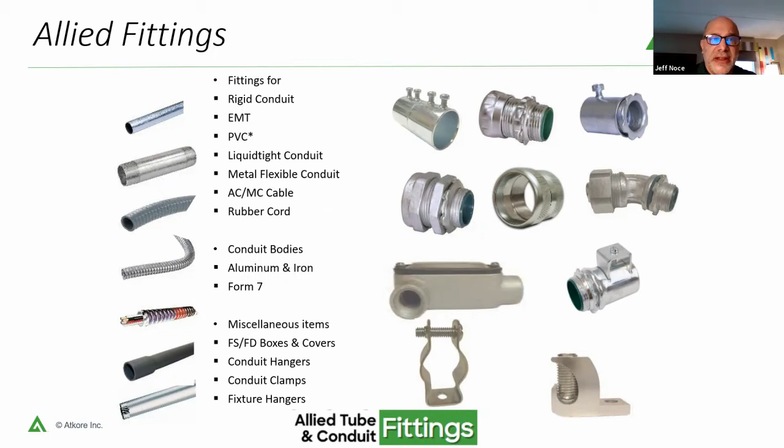One of the areas where Atkore is truly a leader, and one of the things that's nice about working for Atkore, is their investment into innovation and innovation into new products. How do we make products more labor saving and more of a benefit to our end customers?

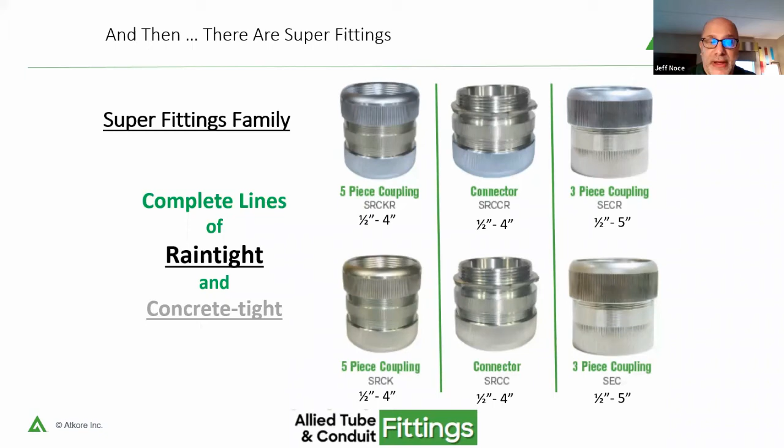The Super Fittings product line is a great example of this. We're going to run through this quickly, but we've got a line of couplings and connectors that are rain tight, concrete tight, and go up to 5 inches for heavy projects. Next slide, please.

The universal 3-piece super coupling. This product is nice because it replaces that old Erickson. With the Erickson, you'd have to take it apart and put everything together. This is 3-piece, no assembly required. It comes fully assembled, and it's good for both threaded and unthreaded product, eliminating the need to thread pipe in the field. If you're going from threaded to unthreaded, you don't have to do any threading. You just put it all in, lock it in, and you're good to go.

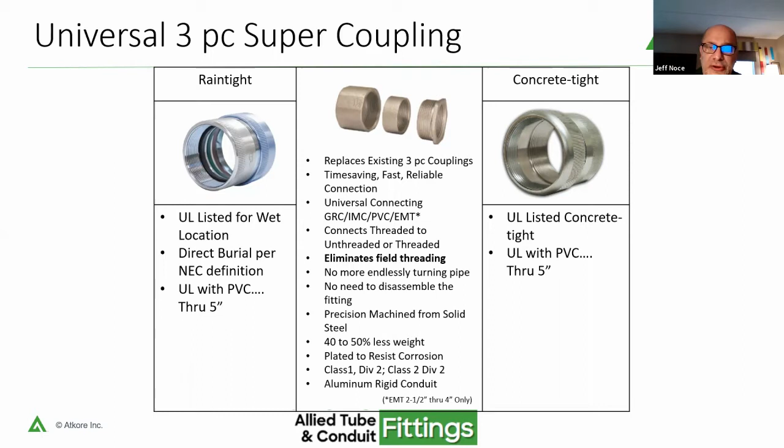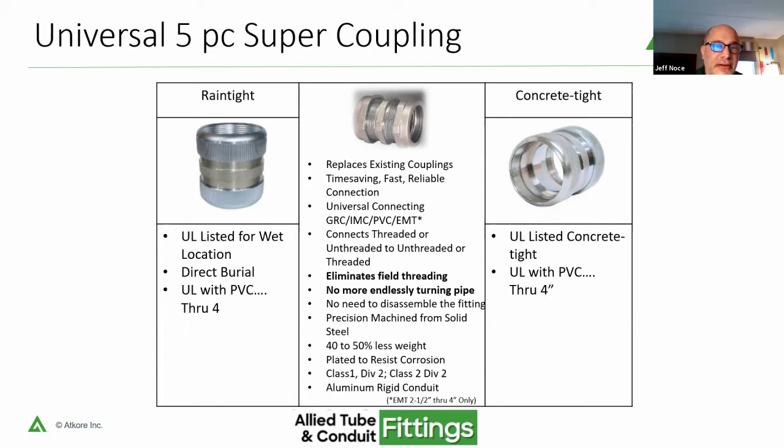Again, the 5-piece super coupling has the same features, but it replaces a lot of existing couplings where you've got to take everything apart. Major time saver, and again it eliminates field threading. What's nice is it's UL listed with rigid, EMT, aluminum, and even PVC pipe. This product is great to have in your van, a great utility product to keep on board.

And again, the super connector. It's like a conduit hub, but on steroids. Great utility part for the truck, meant to be a job site solution. It allows you to take rigid, IMC, PVC, or EMT, threaded or unthreaded, and go right into the panel box.

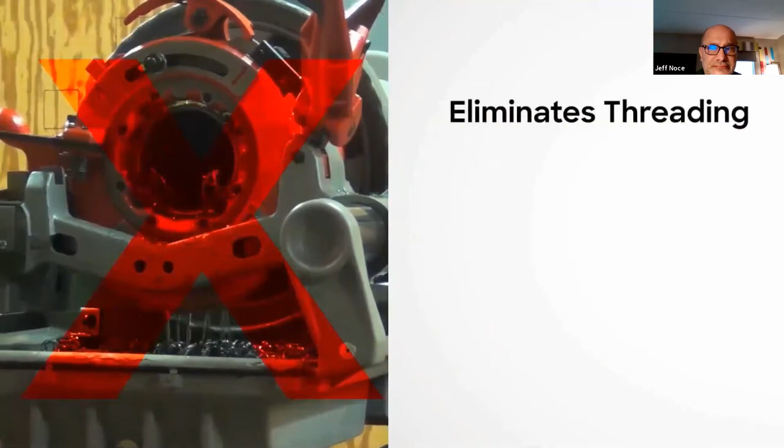So we could go back to the presentation. Again, what you're seeing there is an innovative product that is going to save you in excess of 30% labor savings. If we can go to the next slide. There we go, thank you.

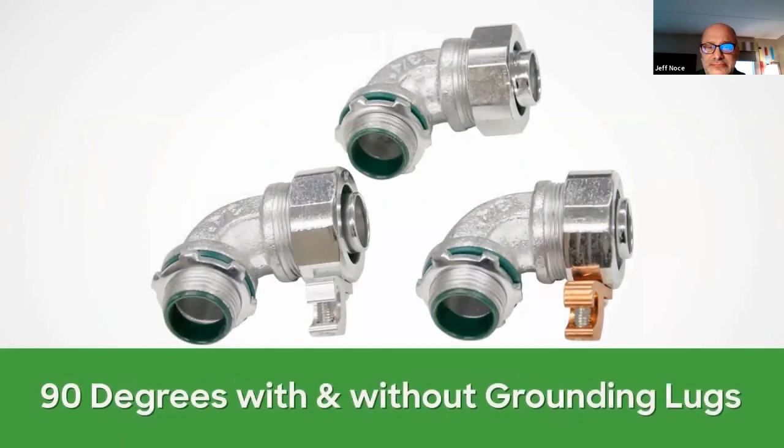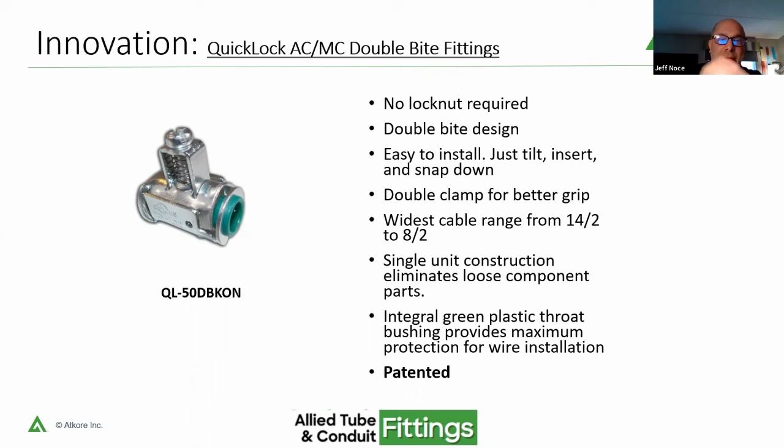Again sticking with our innovative fittings, we're talking about our Quick Lock line of MC connectors. This is the one connector with the widest range in the industry, accommodating all the way from 14-2 up to 8-2. It's single component construction, and you're not going to have loose parts floating around in the box. It comes in the package ready for you to insert the cabling and tighten down, and you're good to go.

Next slide please. More on our Doublebite MC connectors. I want to focus on the saddle grip, with 2 places of contact that clamp down on the MC cable, giving you a more secure connection. One fitting accommodates almost 99% of all our luminary cable designs.

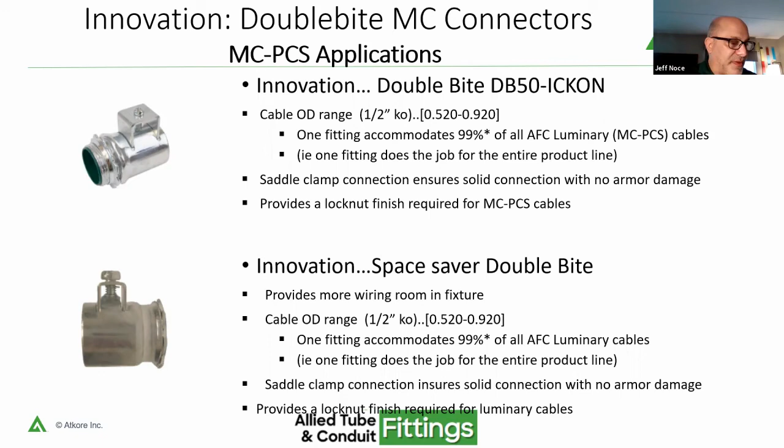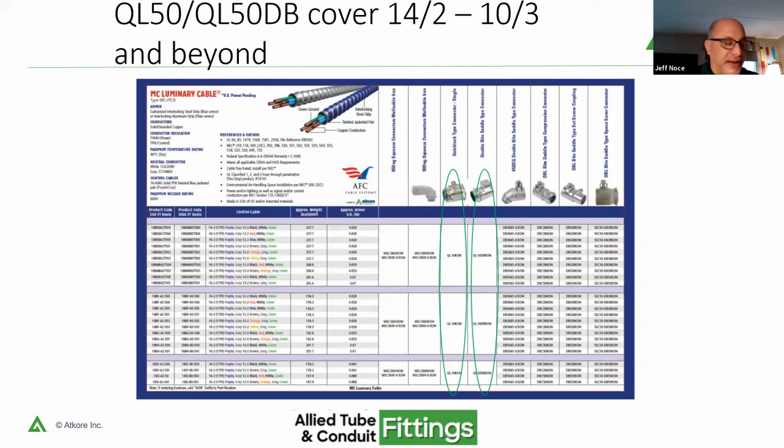If I can go to the next slide please. I know this is kind of an eye chart, but the emphasis here is that we have 2 connectors covering the widest range in the industry of MC cabling with luminary cable, going from 14-2 to 10-3. We have the QL50, and we have the QL50DB, which is a snap-in connector with no lock nut needed, whereas the QL50 would have the lock nut. So whichever is your fancy, we've got those accommodated as well. Next slide please.

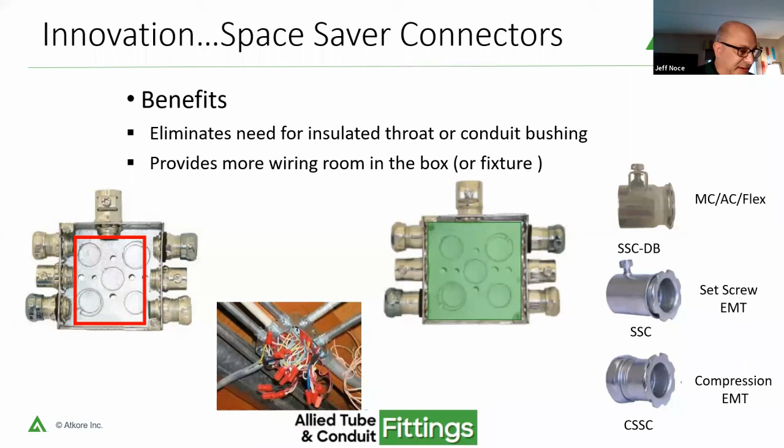One of my favorite fittings here is our space saver connectors. Focus on the picture in the middle - if you're doing any renovation work, that's typical, you have a junction box that's a rat's nest. The picture on the left is our traditional way of doing it: you come in with a connector and a lock nut, eating up a lot of the real estate inside that box. Whereas on the right, the lock nut itself will actually screw into the fitting and be flush with the box, leaving you with significantly more real estate within that box, making it easier to wire up different things.

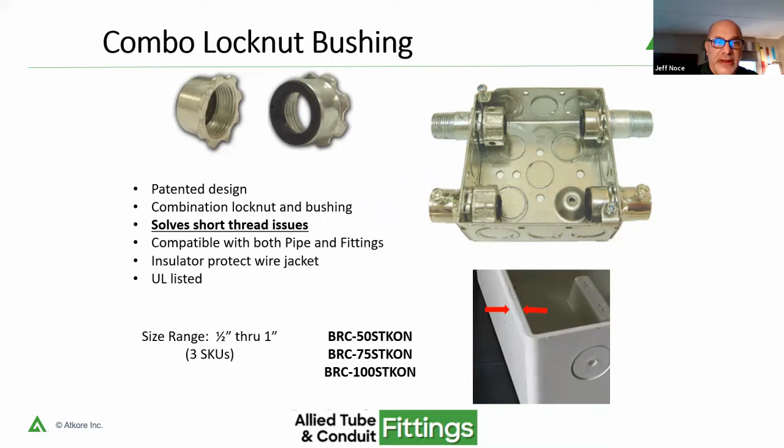Our combination lock nut bushing - what's nice here is it's a problem solver on the job site. A lot of times you get caught with a short thread. This allows you to just install this again - you're going to have a nice flush fitting, and it allows you to extend the threads, so you're able to make that connection and move on. Again, a job site solution.